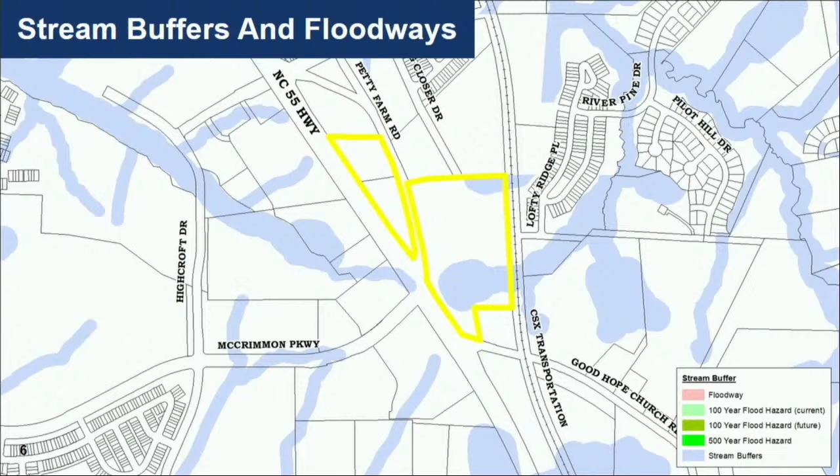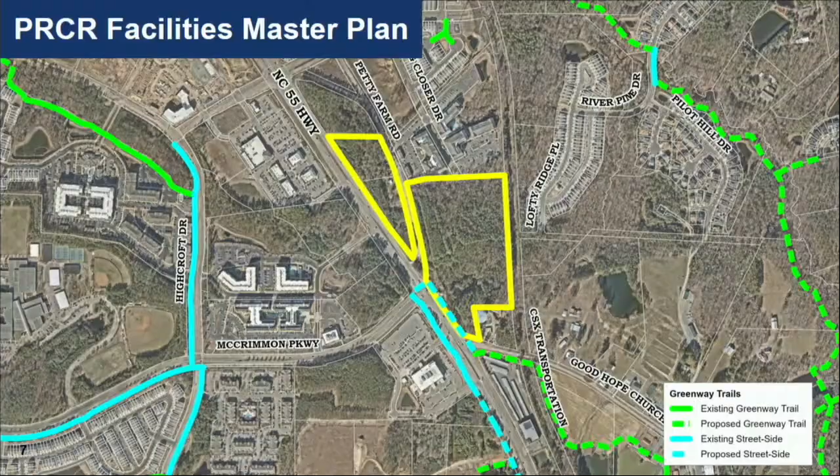The Parks, Recreation, and Cultural Resources Master Plan includes a proposed street-side trail along a portion of the NC 55 frontage of the site, south of McCrimmon Parkway. In addition, a portion of the old Carpenter Greenway corridor is planned along Good Hope Church Road.

The site has frontage on two thoroughfares, NC 55 and the future extension of McCrimmon Parkway, which would be constructed through the site with this project. The site also fronts Good Hope Church Road. NCDOT will close Good Hope Church Road at its crossing with the CSX Railroad in the future.

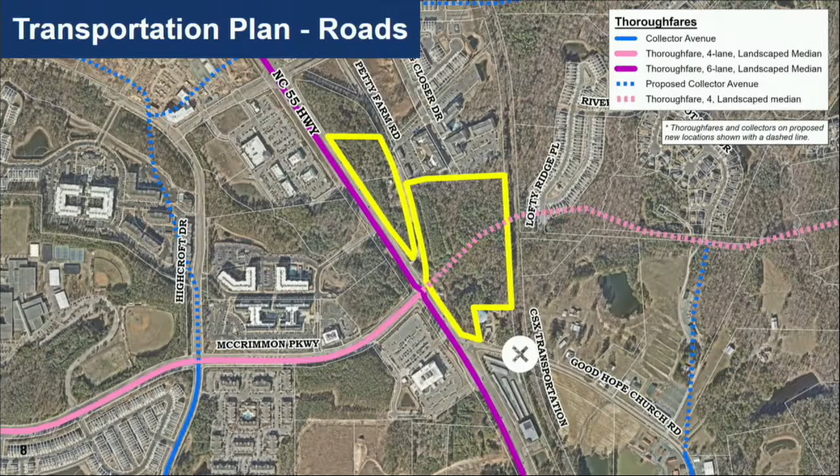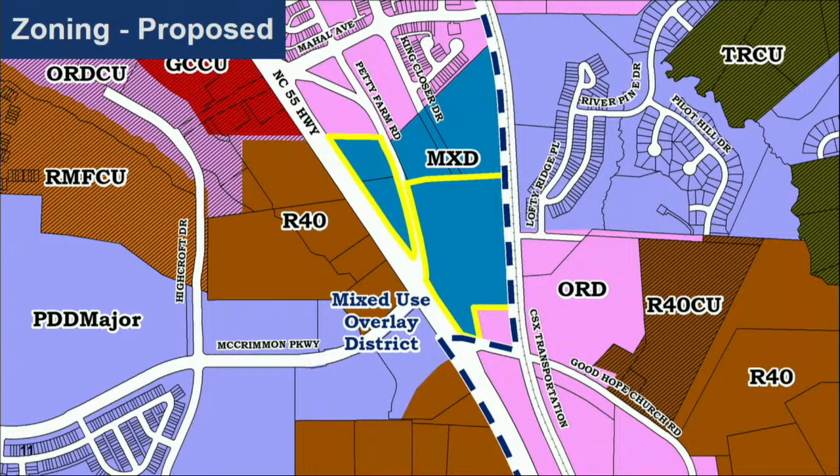The site is currently zoned Office Research and Development, or ORD, and it is also in the Mixed Use Overlay District, and as previously noted, is currently within the Alston Activity Center. The applicant proposes to rezone the site to Mixed Use District with a Preliminary Development Plan, or PDP, and the Mixed Use Overlay District would remain.

The Preliminary Development Plan is seen here, and it's divided into 5 pods. Pod 1 is a commercial pod, which may be developed with single-story commercial uses and surface parking. Pods 2 and 3 are mixed-use pods, which may include commercial, office, and residential uses. Buildings may be between 3 and 7 stories, and at least 75% of parking will be in structured parking facilities.

Pod 4 includes only residential uses and may also be 3 to 7 stories with at least 75% structured parking. And finally, Pod 5 is an office pod. Some commercial uses are also allowed. The tallest buildings would be permitted in this pod, between 3 and 10 stories, and at least half of the parking would be in structures.

Some conceptual detail of the potential layout of pods 1 through 4 are shown on the PDP, while Pod 5 lacks any conceptual details regarding the site layout.

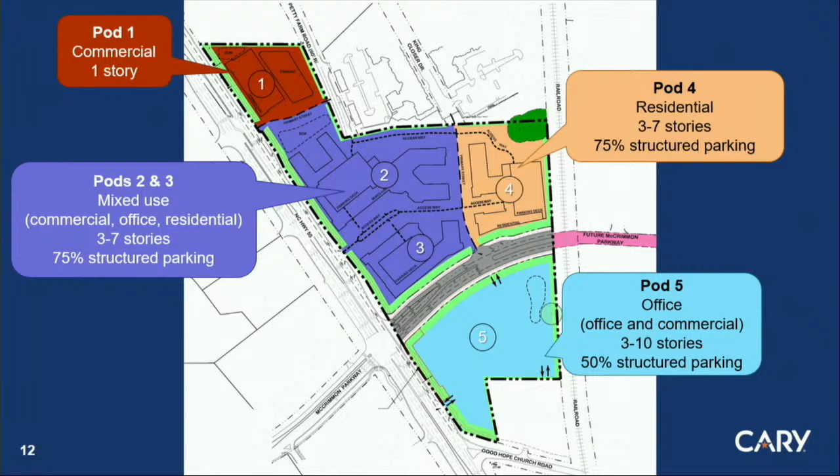The PDP also provides a 15-foot streetscape along Petty Farm Road and 30-foot streetscapes along the NC 55, McCrimmon Parkway, and Good Hope Church Road frontages. This is consistent with LDO requirements, except for a portion of the McCrimmon Parkway frontage which abuts the residential pod, where a 50-foot streetscape would otherwise be required by the LDO.

10-foot perimeter buffers are provided to the north and south. As the adjacent properties are also within the mixed-use overlay district, perimeter buffers are not required, so this does exceed the LDO standard. A perimeter buffer is required adjacent to the railroad, as that is outside of the mixed-use overlay district, and in this case, the applicant proposes to meet the LDO required width of 20 feet along the office pod.

Or Pod 5, and modify the perimeter buffer to a 20-foot buffer along the residential Pod 4, only if parking is provided between the railroad and residential units. Otherwise, a 50-foot type A buffer would apply.

One champion tree is proposed to be preserved of the 2 that were identified on the site. And street side trail is offered along all site frontages on NC 55, McCrimmon Parkway, and the short site frontage on Good Hope Church Road.

This exceeds the minimum LDO requirement, as Cary's long-range plan shows street side trail only along a portion of the NC 55 frontage.

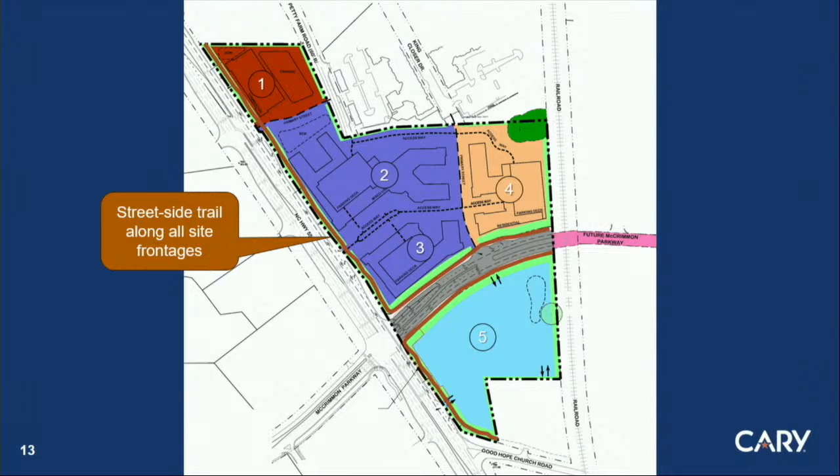The applicant has also offered traffic improvements at all 7 site access points and will be subject to right-of-way dedication and improvements along all the frontages as applicable. This includes construction of the portion of McCrimmon Parkway through the site.

We anticipate the railroad crossing will be grade separated, so details regarding the full extent of the road construction to be completed with this project would be reviewed at time of development plan. We anticipate McCrimmon Parkway to stub to the potential future bridge.

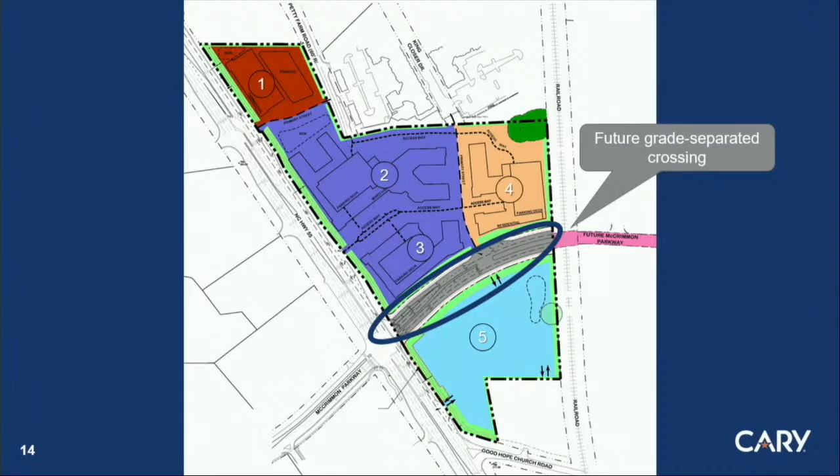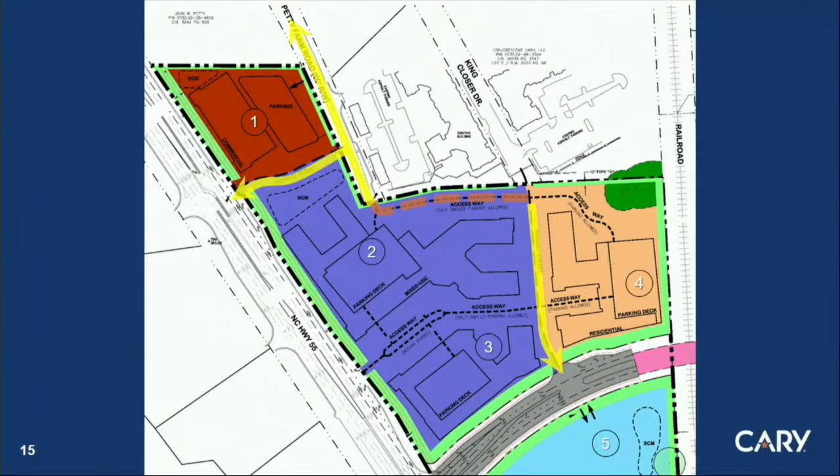The applicant proposes to modify a portion of this network with an access way midway through the site, which would be loaded on one or both sides with parking and may only have sidewalk on one side. This cross-section is also a departure from the Petty Farm Road design, which this ties into.

Use intensities across the site include up to 625 residential units, a maximum 30,000 square foot car wash, a minimum of 15,000 and maximum of 25,000 square feet of commercial uses other than the car wash, and a minimum of 50,000 and maximum of 200,000 square feet of office uses.

Within these use categories, the following are permitted. Residential uses may include multifamily or life care community. Office uses may include business or professional office, as well as medical office, as long as it does not exceed 60,000 square feet. The applicant has limited the size of this use, as it typically generates more trips than professional office. Office uses could also permit broadcasting studio or wellness center.

Commercial uses include those such as bank, bar, restaurant with drive-throughs prohibited, recreational uses, and a number of retail uses. Car wash is permitted, as previously noted, only within Pod 1.

Additional development standards include providing a minimum of 5% of the units as workforce housing units, affordable at or below 80% of the area median income (AMI) for a period of 30 years, as well as constructing at least 5% of the units at a maximum of 750 heated square feet. This condition could overlap with the affordable housing condition.

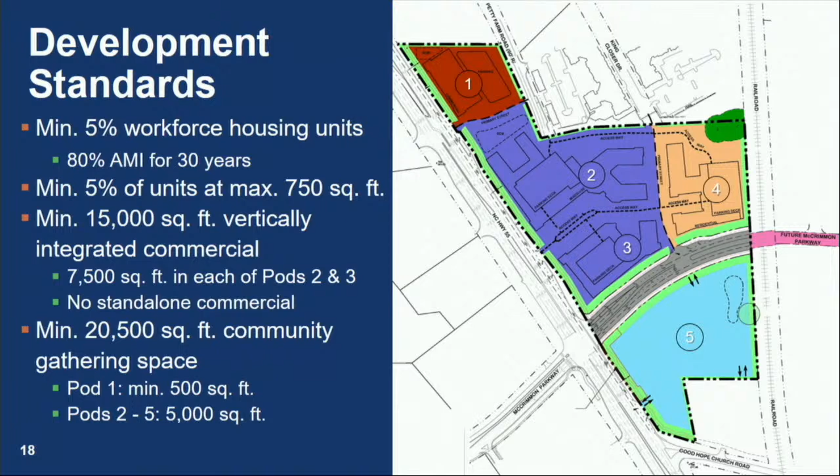A commitment to vertical integration of 15,000 square feet of commercial uses, 7,500 each in Pod 2 and Pod 3, and over 20,000 square feet of community gathering space distributed across the site, with at least 500 square feet in Pod 1 and 5,000 in the others.

The PDP also commits to screening of parking decks by wrapping them with buildings in Pods 2 and 3, at least partially wrapping decks in Pod 4, and in the office pod, Pod 5, decks may be screened with green walls or artwork.

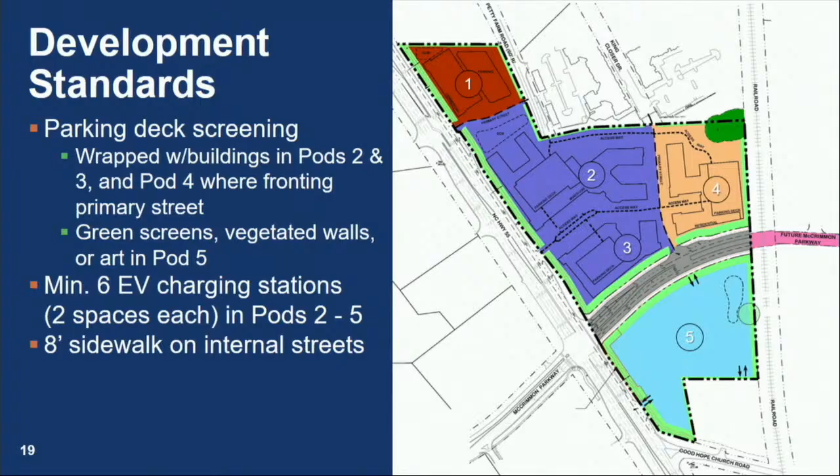There will be at least 6 EV charging stations accommodating 2 spaces each in Pods 2 through 5, for a total of 48 spaces minimum. An 8-foot sidewalk is provided along all internal streets and travelways, which is an increase to the LDO required 5-foot sidewalk.

The applicant has also provided several development standards that would apply specifically to a car wash use on Pod 1. These include fully enclosing all equipment, including vacuums, in the building, limiting drive-through lanes through the building to only 1, including 8 solar panels on the roof, and designing building facades with 85% masonry, which exceeds the community appearance manual requirement of 75%.

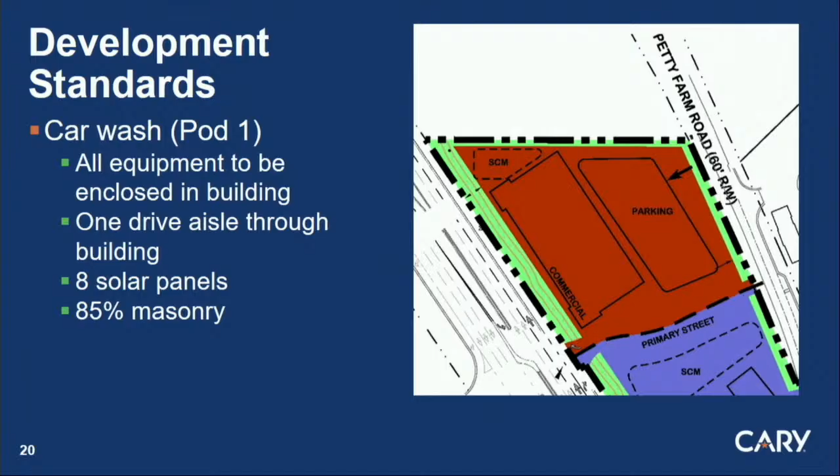The PDP also includes a number of proposed modifications, including the ability to clear and grade all streetscapes, and a reduced perimeter buffer along the residential pods border with the CSX Railroad, as previously noted. However, this modification is proposed only if parking is located between the multifamily units and railroad.

The 50-foot residential streetscape along McCrimmon Parkway is reduced to 30 feet. Internal streetscapes are proposed to be reduced from the 15-foot width required for non-residential uses to 8 feet. These may be largely hardscaped areas with a reduced planting rate.

Removal of one champion tree of the 2 surveyed on site, with replacement inches to be provided per the LDO; an allowance for decorative retaining walls around stormwater control measures to be 10 feet in height, an increase to the LDO limit of 6 feet, but only where they're not visible from public streets or greenways. And as noted previously, some modifications to the LDO requirement for a complete street network through the site.

An analysis against the Imagine Cary Community Plan finds that policies in many chapters apply. The project contributes to housing variety by providing multifamily and/or life care units in a mixed-use center and ensuring some smaller units. While the overall concentration of multifamily in this area is high, denser housing types are intended to be largely sited in these mixed-use areas.

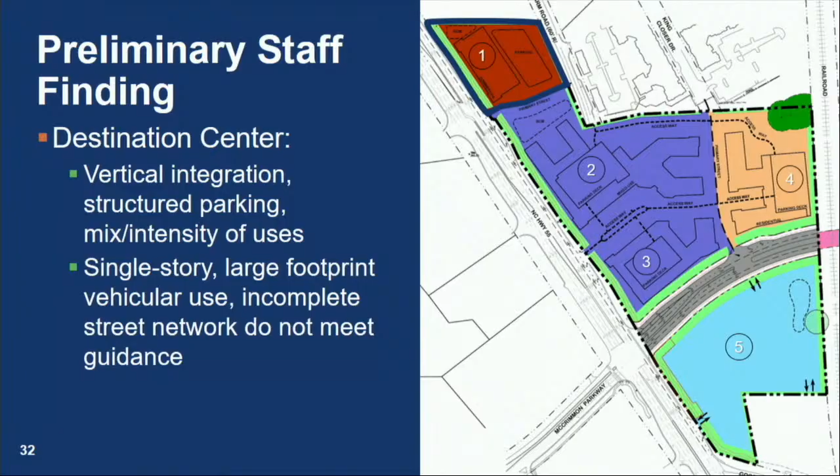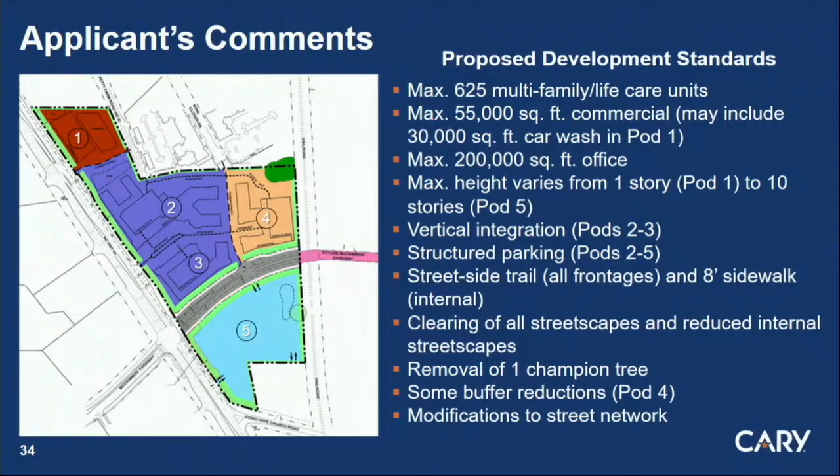Good evening, Mr. Chair, members of the board. Jason Barron with Morningstar Law Group. Sorry, I don't know if I'm standing close enough to this. It's great seeing everybody tonight. Happy to be here on behalf of my client, Capital Commercial. They are the proposed developer of this site. Tyler Morris and Jason Stegall are joining me. They're here tonight as well to hear your discussion associated with the case.

Like with most cases involving a preliminary development plan, we've been at this for a little while. We've been in the zoning process, but that's the nature of it. As it goes through the various submittals and plan reviews, plans have a tendency to get better, and I think this case is an example of that.

I'm going to highlight a handful of things. The staff report and Aaron's presentation have been excellent, just kind of giving you the nuts and bolts of where we are as it relates to the submittal itself, the proposal itself, what we're trying to achieve here, and the role of the Cary Community Plan in reviewing that.

I did want to provide, and I've mentioned this to Katie before we started, one of the questions we received during the public hearing was from the town council was just, what's the idea? What's the sense of place? What are we trying to achieve here? And oftentimes, especially with these preliminary development plans, you have these two-dimensional concepts that you don't have an idea of what that 3 dimensions is supposed to look like.

So we shared some renderings with the town council. I've got 3 of them that I'm going to distribute to you all so you can take a look and see what we shared with council shortly after the public hearing. Jess, if I could hand these to you, that'd be great.

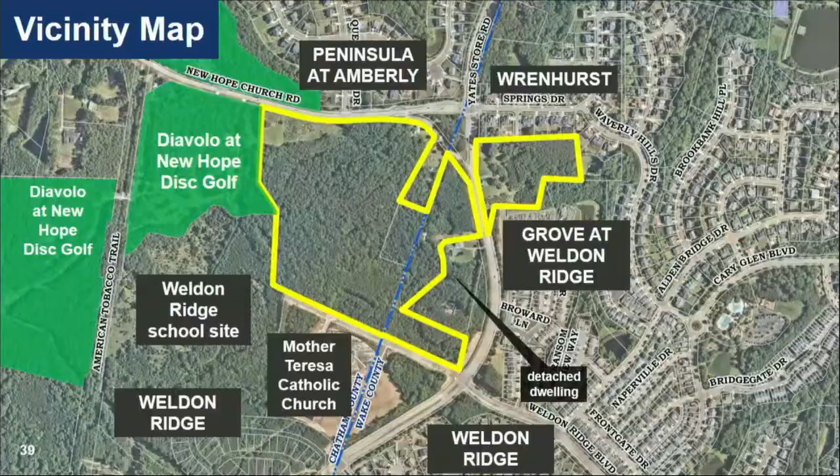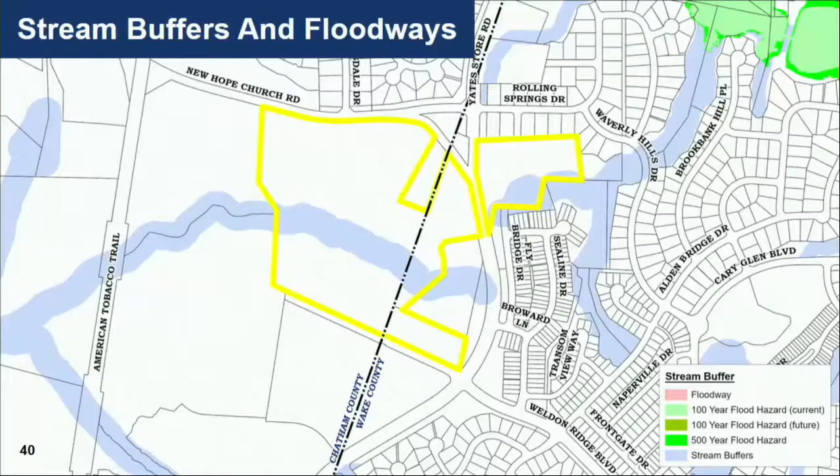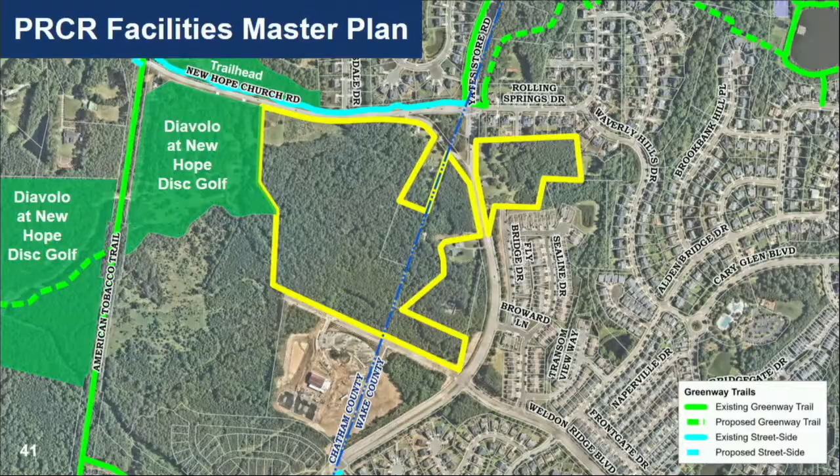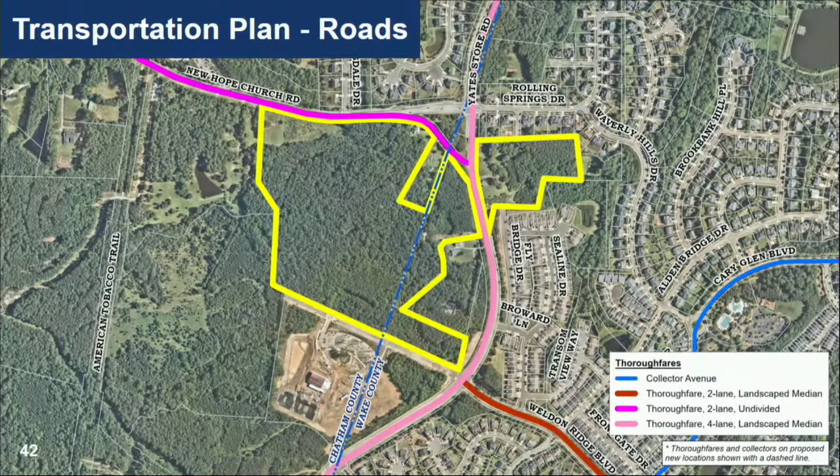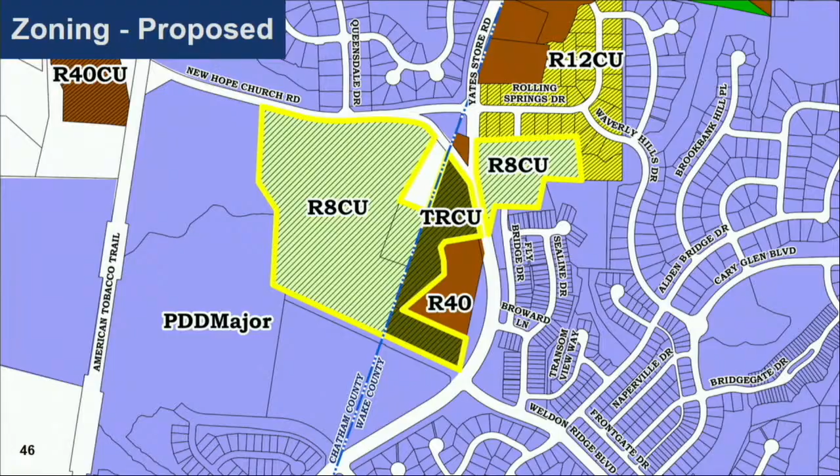The proposed zoning is Residential 8 conditional use for detached dwellings and Transitional Residential conditional use for townhomes. The applicant has provided a concept plan that illustrates many of the zoning conditions, including the proposed use and maximum units for each area.

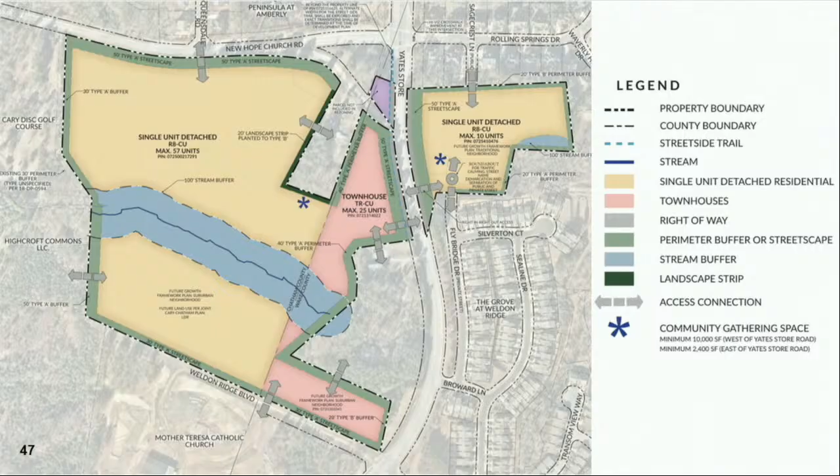There are 2 R8 CU areas for detached dwellings on 10,000 square foot minimum lots, with a maximum of 57 homes on the western area and 10 homes on the eastern area. The TRCU area, shown in pink, is for a maximum of 25 townhouses. The concept plan also illustrates the locations of streetscapes, buffers, community gathering areas, and access points.

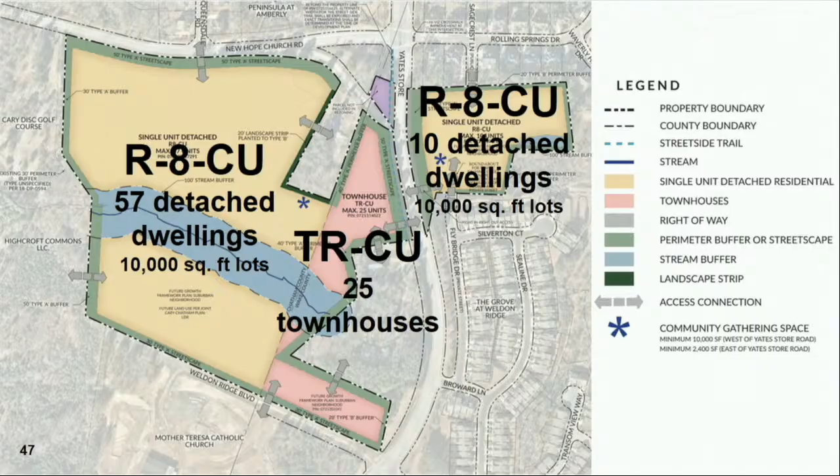Other zoning conditions include a community gathering area of 12,400 square feet, which exceeds the LDO minimum of 5,000 square feet for a development of this size, with a pick list of amenities for the 2 locations. Minimum lot sizes shall be calculated outside of stream buffer areas. Some required perimeter buffers will be on common open space lots. The applicant will also certify they have offered historic materials for salvage if demolition permits are sought.

The applicant has also committed to providing additional buffer adjacent to the Cary Disc Golf Park. This commitment and the numerous transportation improvements to meet or exceed LDO requirements in terms of connectivity, traffic calming, access management, and pedestrian and roadway improvements are best understood visually.

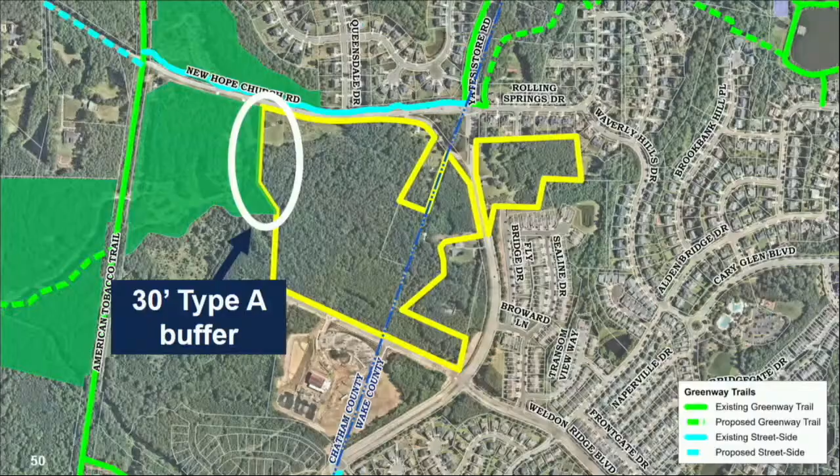The 30-foot Type A buffer along the western edge of the site adjacent to the disc golf park is wider and denser than the 20-foot Type B buffer required by the LDO.

As shown in pink, the applicant is committing to build a street side trail along the west side of Yates Store Road, where only a 5-foot sidewalk is required along the site's frontage. They've also committed to extending the street side trail north to the Yates Store Road and New Hope Church Road intersection beyond the rezoning area, an off-site improvement that adds about 900 feet of new trail and connects the existing street-side trail network on the north side of New Hope Church Road via the pedestrian crosswalk at the intersection.

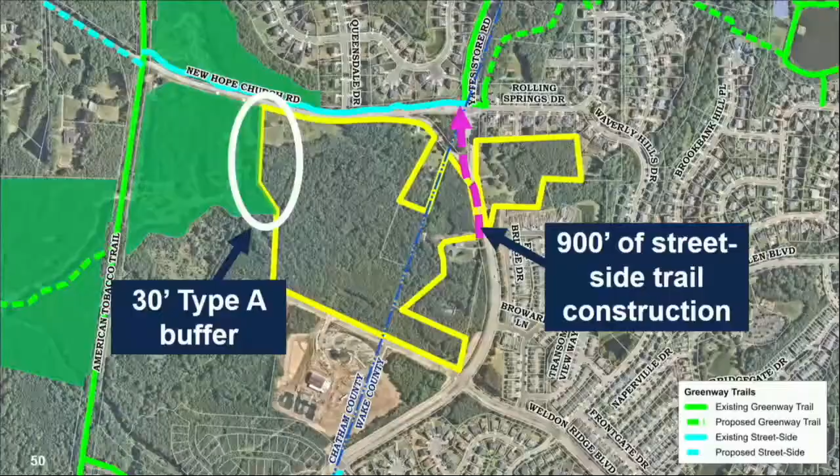To provide connectivity, a new access point will be built from Yates Store Road to serve the 10 homes proposed on the east side of Yates Store Road. This access point and the existing roadway stubs will connect via a roundabout, helping to slow traffic.

During construction, access will be limited to Yates Store Road, with barriers on existing roads to help reduce construction impacts. Access management will occur via direct driveway restrictions to Weldon Ridge Boulevard.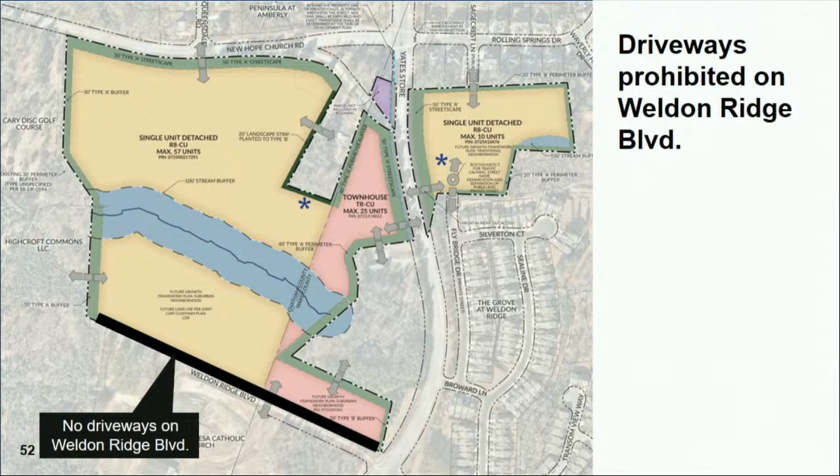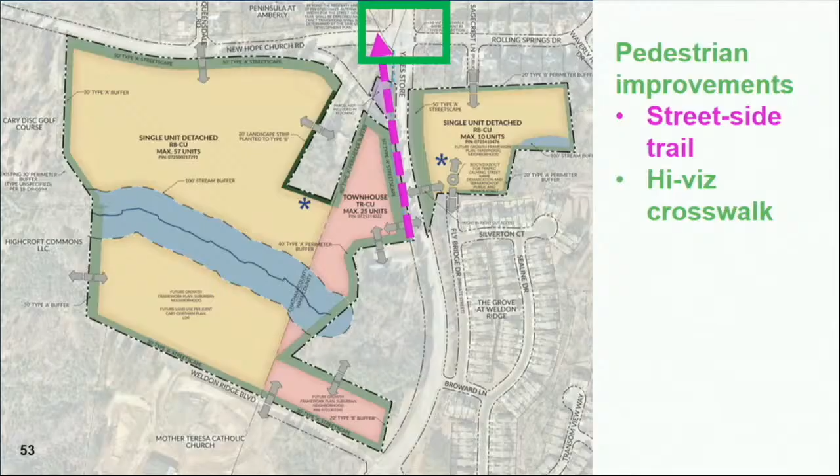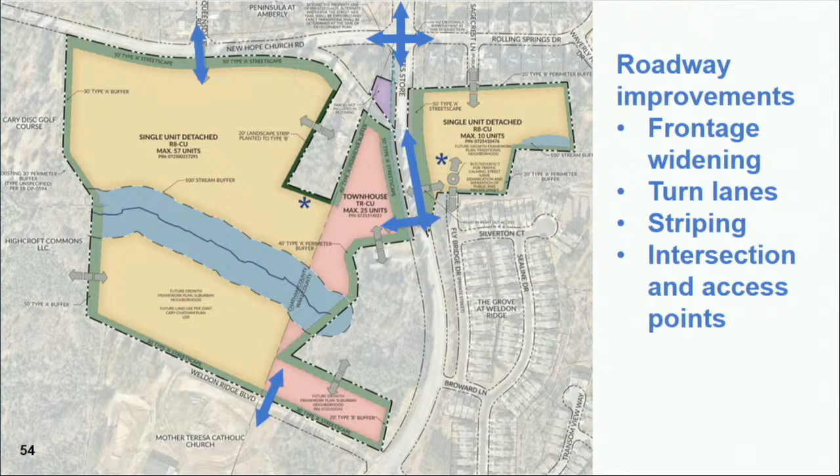Pedestrian improvements include the previously mentioned street-side trail on the west side of Yates Store Road, as well as an off-site commitment to install a high-vis crosswalk at the eastern leg of the Yates and New Hope Church Road intersection. Finally, as described in more detail in the staff report, the applicant will construct numerous roadway improvements, including frontage widening, adding turn lanes, striping, and improvements at intersections and site access points.

Staff has evaluated the rezoning against the Imagine Cary community plan. First, we note the western portion of the site is located within the Chatham-Cary Joint Land Use Plan low-density residential sub-area, which recommends densities not to exceed 2 dwelling units per acre. This proposal has a maximum density of 1.74 dwellings per acre in the portion of the site in Chatham County. This is consistent with the joint plan.

The site spans 2 future growth framework designations: suburban neighborhood on the west side of Yates Store Road and traditional neighborhood on the east. Suburban neighborhoods primarily support detached homes with limited townhouses in appropriate locations. The proposed townhouse area may align with this, given its defined location, limited number, and added community gathering space. Detached homes are supported in the traditional neighborhood area.

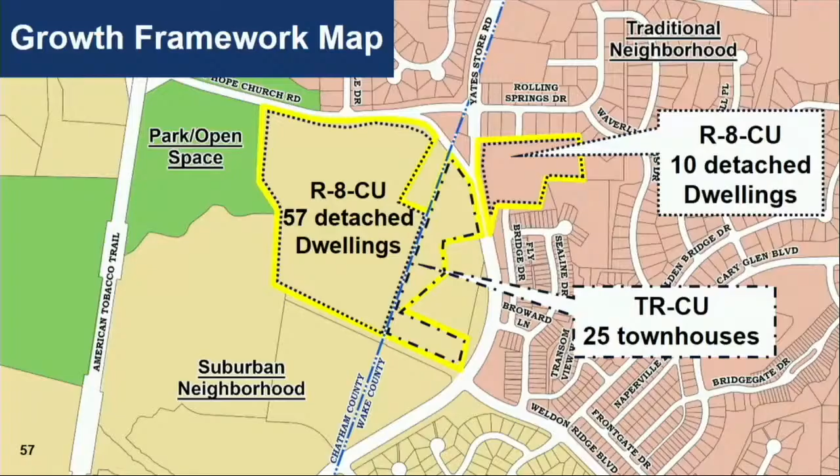When looking at the Live chapter, we note the proposal will add additional housing stock to Western Cary and the option to live in either a townhouse or a detached dwelling.

The Shape chapter emphasizes transitions through use mix, design, and buffers. The proposed density is under 2 units per acre and is similar to nearby developments, though with somewhat smaller lots. Clustering of development is likely to offset the lot sizes, given the stream buffer and additional community gathering space. Enhanced buffers, such as the wider, denser buffer along the Cary Disc Golf Park and perimeter buffers on common lots, may also improve transitions.

Wider streetscape and perimeter buffers in other targeted areas may further support goals in the Shape and Engage chapters.

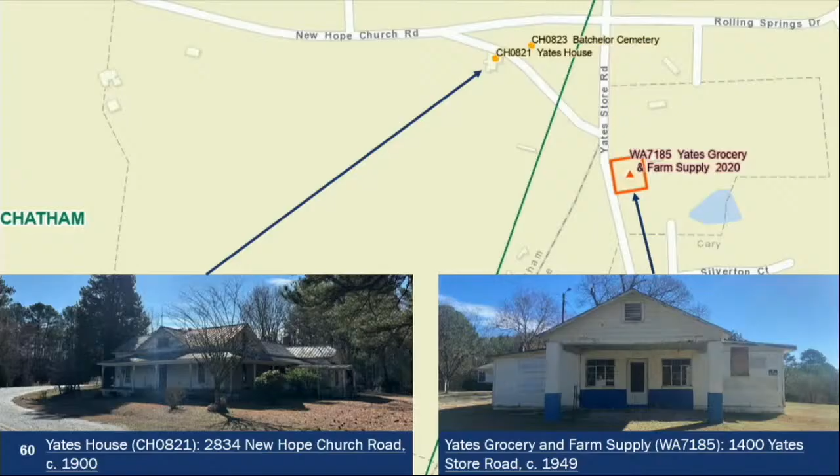Cary's 2010 Historic Preservation Master Plan, which is part of the Imagine Cary Community Plan, supports preserving historic resources. Two surveyed sites are on the property: the Yates Grocery and Farm Supply on Yates Store Road and the Yates House on New Hope Church Road, each with multiple structures. Neither is listed on the National Register of Historic Places or designated as a Cary local historic landmark, though the State Historic Preservation Office has deemed the Yates Grocery and Farm Supply eligible for the National Register. Information from Capital Area Preservation is included in the staff report.

A zoning condition has been offered to certify that historic material salvage will be pursued before any future demolition. This condition does not require demolition or prevent preservation efforts. Salvage may offer some benefits in terms of the reuse of building materials.

When looking at the Move chapter, we note policies to ensure the safety and design for all users. On the east side of Yates Store Road, the applicant will build a new connection to Yates Store Road, as well as a roundabout to provide connectivity and slow traffic, and construction traffic will use Yates Store Road to minimize impacts to the existing neighborhoods. The driveway restrictions on Weldon Ridge Boulevard will also have access management benefits.

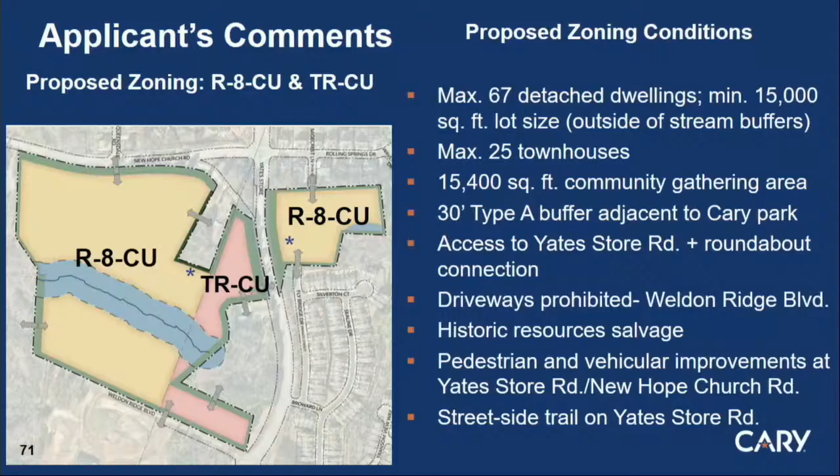Good evening, Chair, members of the board. Letitia Shapiro, Morningstar Law Group, here on behalf of the applicant Tucker Development. Here with me this evening is James Tucker of Tucker Development, Ed Tang of Withers Ravenel, who has been involved in design of the site, and Travis Fluitt, who has helped the applicant team with regard to traffic.

I want to thank staff for all of the hard work that went into getting us here tonight, and Rachel did a wonderful job of presenting the details of the case. So I would just like to highlight a few points.

As mentioned, the case is supported by policies within the Live, Shape, Engage, Move, and Enrich chapters of the Cary Community Plan, and is also keeping with the Chatham-Cary Joint Land Use Plan.

With respect to transitions, as you see, this is a split rezoning, and the reason for that split rezoning is because we wanted to be very mindful of the transitions that were supported in the Cary Community Plan and in the Chatham-Cary Land Use Plan.

So the split zoning allows us to develop the townhomes directly on the west side of Yates Store Road, across from the Grove at Weldon Ridge townhomes, and then transition into single family as you move towards Chatham County. And then on the east side of Yates Store Road, to the north of the Grove at Weldon Ridge townhomes, there's again that transition into single family adjacent to the existing Renhurst neighborhood.

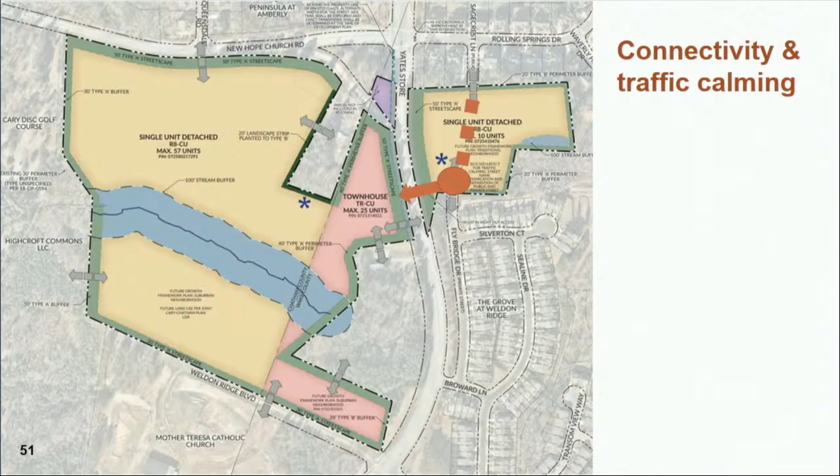And do we have any retention pond or concern because of where we have a stream going through, a watershed? I'm trying to read what the blue is—is that just a stream or watershed setback? A 100-foot stream buffer will be required. There will be field investigation of the exact extent at the time of development plan review, but that will be a subject regulated waterway.

Okay, these are my two concerns. To piggyback on her question, can you cross the stream buffer with a street, or you don't know that at this point? All those connections will be determined at the time of development plan.

And although not noted, I'm assuming there's going to be connectivity through the townhouse community into the single unit detached homes. Exact connectivity will be determined at the time of development plan. The connections to the adjoining properties are generally shown by the gray. I would presume there will be street connectivity between the two sites, given the extent. My friend from transportation may want to speak to that.

Yes, there will be connectivity between the single-family pods and the townhome pods. That's all my questions. I don't think I have any additional questions.